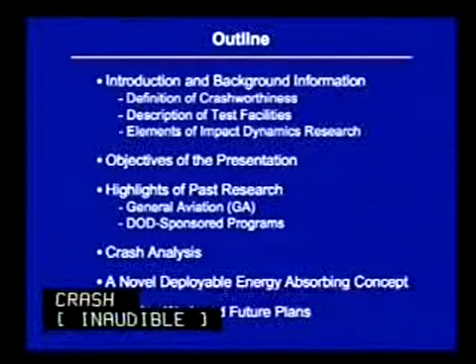Okay, this is just a short outline of my presentation. I'll begin by making a few introductory comments, try to give you a definition of what crash worthiness is. I'll describe test facilities that we have at NASA Langley and talk about some of the key elements of impact dynamics research, whether that research is applied to aeronautics or aerospace.

I'll then give the objectives of the presentation, and basically those objectives are to focus on three areas. First is highlights of past full-scale crash test programs that have been performed at NASA Langley. I'll talk in detail about crash analysis. I'll present a fairly novel deployable energy-absorbing concept that we have recently developed within our group. And then I'll conclude with some ongoing work and future plans. Next slide, please.

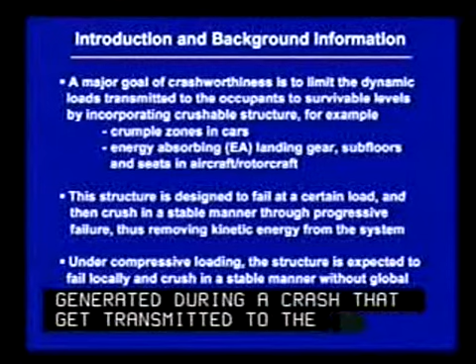The major goal of crash worthiness research, whether it's applied to automobiles or aerospace vehicles, is to limit the dynamic decelerative loads that get generated during a crash and transmitted to the occupants, to either survivable or non-injurious levels. We do this by incorporating crumple zones, for example, in automobiles, and in aerospace or airplane applications, we have energy-absorbing landing gear, subfloors, and seats. Now, the purpose of this crumple zone or crushable structure is to fail at a certain load and then to crush stably over a long period of time to dissipate kinetic energy. I'll talk a little bit more about that in just a moment. Next slide.

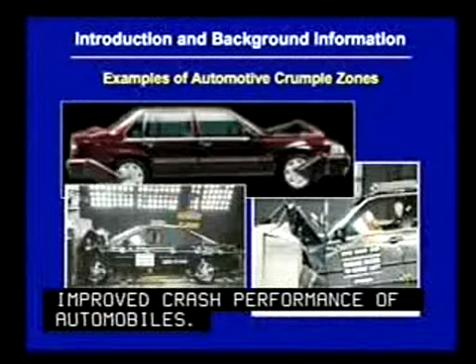Here are some examples of automotive crumple zones. The automobile industry has been very forward-thinking in applying crash features to automobiles. Part of the reason for that is regulatory requirements. Part of it is that the market demands improved crash performance of automobiles. Automobiles have crumple zones. They also have frontal and side airbags. They have anti-skid brakes. They have a lot of features that are designed to protect occupants in a crash.

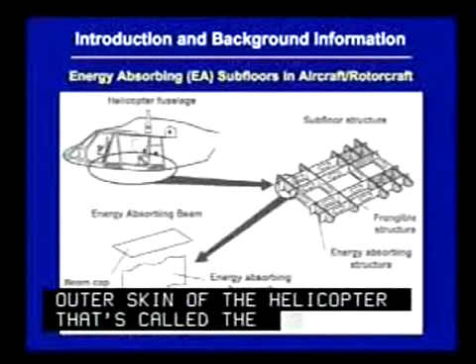Next slide, please. We also have similar features in rotorcraft and aircraft. For example, here I've shown a schematic drawing of a helicopter. There's a region between the floor and the outer surface or outer skin of the helicopter that's called the subfloor. And that region can be designed to absorb energy in a crash through controlled displacement.

Now, you're also going to hear me use a term called stroke. Stroke is very much a terminology that's similar to strain. Essentially, for this type of application, you have a structure that's subjected to compressive load. It deforms. You take that deformation, you divide it by the total original height of the structure, and then that's called the stroke. And when you multiply that times 100, then you get percent stroke. So you'll hear me use that terminology, and I just wanted to make you familiar with what it means. Next slide.

Now we ask the question, what factors are involved in aircraft crash safety? There are several important features and factors.

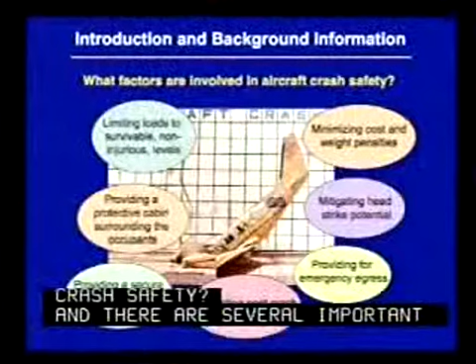The first is that we want to limit the loads that get transmitted to the occupants to survivable, non-injurious levels.

The next is you want to provide a protective shell surrounding the occupant. This is often very important for rotorcraft because you have large rotor and transmission masses mounted above the occupiable area of the helicopter. During a crash, that mass can actually deform the structure and close in on the occupants, which is an undesirable situation.

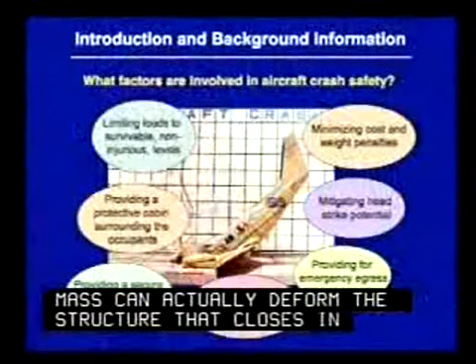You also want to provide a secure tie-down of the occupants using seats and restraint systems, so the occupant doesn't become a projectile inside the cabin of the aircraft.

You want to eliminate post-crash fire hazards, and this has essentially been done for most rotorcraft, especially military rotorcraft, using crash-resistant fuel systems. You also want to provide for emergency egress.

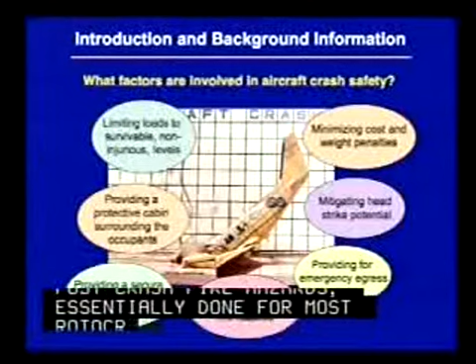You want to mitigate head strike potential, and again this is a challenge for rotorcraft because you have cyclic control sticks that are in the way when the occupant flails or the head falls forward, which can be a head strike potential. And you want to do all these things while minimizing the cost and weight penalties associated with crash.

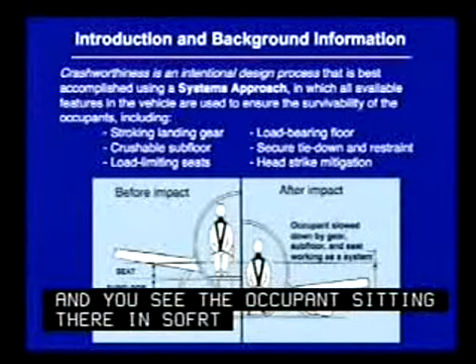Now I have a schematic that shows a before and after. You see the occupant sitting in a general aviation aircraft, and he has available to him a certain distance that can be used to absorb energy. He has landing gear that can stroke, a subfloor that can crush, and load-limiting seats.

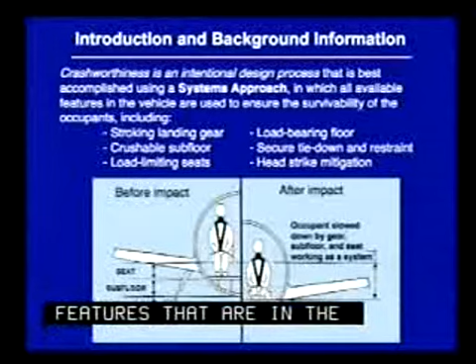The ideal situation for crash-worthy design is that it's accomplished using a systems approach, in which all of the features in the aircraft can be used to absorb energy and dissipate kinetic energy of impact. In the after condition, the landing gear is stroked, the subfloor has crushed, and the seats have deflected. The occupant has been decelerated in a controlled, stable manner, resulting in a survivable impact.

Now I'm going to switch gears with definitions and talk about facilities. I work at a very unique facility called the Landing and Impact Research Facility. It was recently renamed - we call it LandIR now.

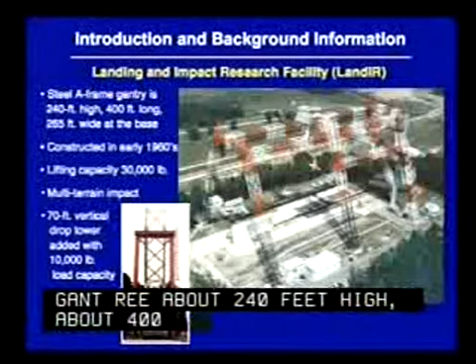It's a steel A-frame gantry, about 240 feet high, about 400 feet long, and about 265 feet wide at the base. It was constructed during the early 1960s, has a lifting capacity of about 30,000 pounds, and during the late 1970s we added a 70-foot vertical drop tower under the northwest leg of the gantry, used for vertical drop tests of fuselage sections.

The facility wasn't originally built as a full-scale crash test facility. It was built in the early 1960s as a lunar lander research facility, used to allow the Apollo astronauts to train for the last 150 feet of descent onto the lunar surface. This was used for this application from 1964 until about 1970. Using a tethering system, we could actually simulate the one-sixth gravitational environment of the moon.

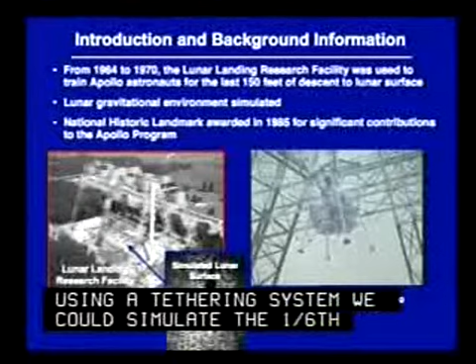Because of its significant role during the Apollo program, the facility was awarded a National Historic Landmark in 1985. You see a picture of the gantry - the surface underneath was cratered to look like the surface of the moon. The astronauts would climb into the lunar excursion module and practice lunar landings.

I have a short video to show you here of one of those practice runs.

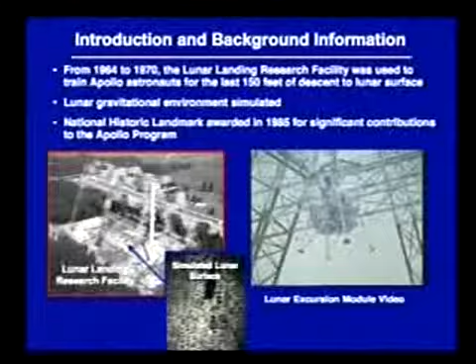As the Apollo program was coming to a close in the early 1970s, the facility was converted into a full-scale crash test facility. During the ten-year period from '74 until '83, we had a very active general aviation crash test program. I'll discuss that a little bit more later.

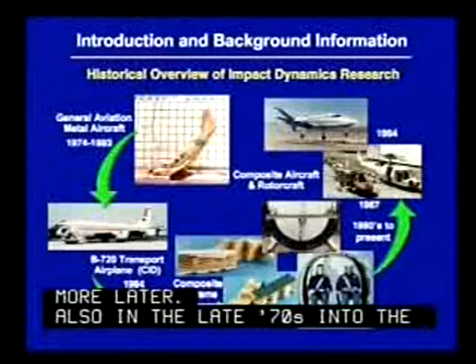Also, in the late '70s and into the early '80s, we were starting to look at crashworthiness of transport aircraft. That test program culminated with the full-scale remotely piloted crash test of a Boeing 720, performed out at Edwards Air Force Base and NASA Dryden.

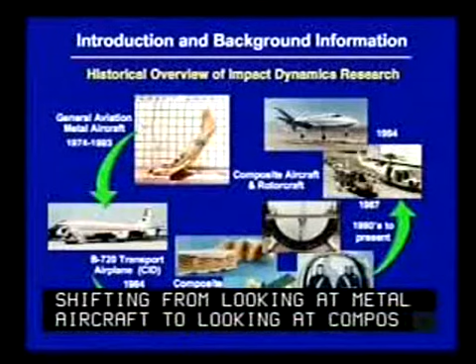In the early 1980s, the focus of the program was shifting from looking at metal aircraft to looking at composite materials. The research used a building block approach to see how we could incorporate energy-absorbing concepts into crash-worthy composite aircraft. We looked at crushing subfloor concepts, frame-stiffened designs, eventually fuselage sections, and the technology has matured to the point where we've done full-scale crash testing of all-composite general aviation aircraft and rotorcraft.

Finally, I want to talk about some of the key elements of impact dynamics research. Essentially, the goal of this research, of any research program that has an element of impact dynamics, is to develop a fundamental understanding of the crash response of aerospace vehicles. Once we understand the response, we can look at ways to improve the crash performance of that particular vehicle. That is like a stool, with 4 legs supporting it.

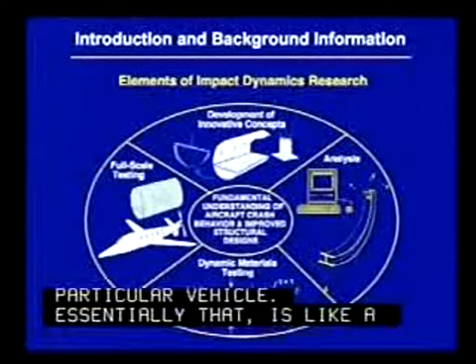The first is full-scale crash testing. We have this unique facility. We need to perform testing so that we can understand the physical phenomenon associated with crash.

We also have done quite a lot of work in impact simulations using analysis tools, and I'll talk about that shortly. We often have to look at development of innovative concepts for crashworthiness applications. And then the final key element is dynamic materials testing. Often if you go to a handbook, you can find stiffness properties, yield properties, ultimate failure strain, but you often will not find how that material behaves under dynamic loading. So we have to do testing to generate the information used in our analytical simulations to improve the correlation that we have.

Objectives of the presentation are to focus in 3 areas. I'm going to talk about some of the past full-scale crash test programs performed at the facility. This is sort of fun, you get to see videos, and I hope you enjoy it. Then I'll talk about crash analysis, and finally I'll talk about development of an innovative concept for crashworthiness that has recently been developed and has application to both aerospace and aeronautics.

Back in 1974, NASA entered into agreement with the FAA and the GA industry to look at the crash performance of general aviation aircraft. The objectives were to determine the dynamic response of the integrated system, the airframe, the seats, and the occupants. We also wanted to look at the effect of varying flight parameters on structural damage during impact, and we looked at failure modes of seat restraint systems and seats. The program also included a lot of background work on development of analytical simulation tools, test data evaluation, and structural concept development.

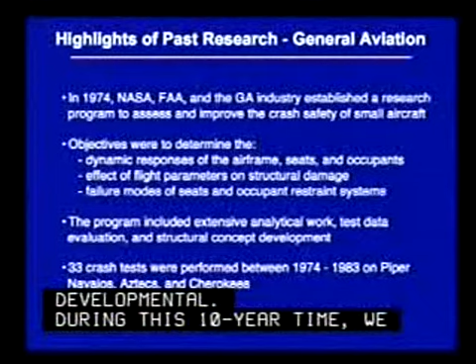During this 10-year time, we performed 33 full-scale crash tests, mostly of Piper aircraft, particularly Navajos, Aztecs, and Cherokees.

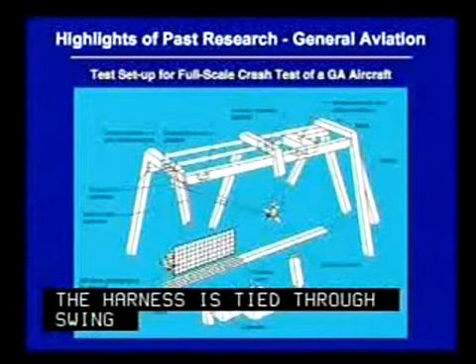This slide shows a schematic of the gantry, and I'll discuss how the facility is used for performing full-scale crash testing. Essentially, you see an airplane suspended from the gantry. There's a set of cables attached to an aircraft harness, and by adjusting the lengths of these cables, we can get pretty much any roll, pitch, or yaw attitude that we want. The harness is tied to the gantry through swing cables and pullback cables. We pull the aircraft back, release it, and it comes to the ground, and about 3 to 4 feet above the ground, all of the cables are pyrotechnically separated from the aircraft so that when it hits the ground, it's in free flight conditions.

We often have quite a lot of instrumentation on these tests, typically between 100 and 200 channels of data, collected at about 10,000 samples per second. We have a lot of external cameras, video cameras, high-speed film cameras, and cameras on board to see how the seats and occupants are responding. I think that's about it. Let's go on to the next slide.

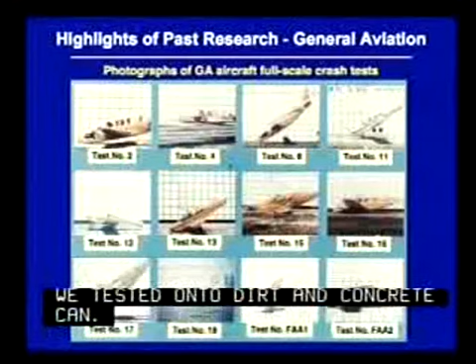This slide shows a montage of some of the tests performed during this 10-year period. You can see we tested high-wing aircraft, low-wing, some fairly shallow impact angles, and some were fairly steep. We tested onto dirt and onto concrete. We were really looking at this as a landmark study, used to establish what is a survivable envelope for crashes of these type aircraft. This is important because most of the fatalities and injuries that occur upon a crash of GA aircraft occur because of the impact itself, since these aircraft don't carry enough fuel to have smoke and fire as a major cause of fatalities and injuries.

As I mentioned, back in the 90s, and this is when I came on, back in the 80s, beginning of the 80s, the shift of the program focused from looking at metal aircraft to looking at composites.

This technology has matured to where we've done full-scale crash tests of a number of all-composite aircraft. Beginning in 1994, we did the first crash test of the Lear Fan. Just to let you know, the Lear Fan was the first all-composite aircraft to attempt FAA certification. Unfortunately, it failed certification, and the company went into receivership, and we were able to purchase 2 of the aircraft for crash testing.

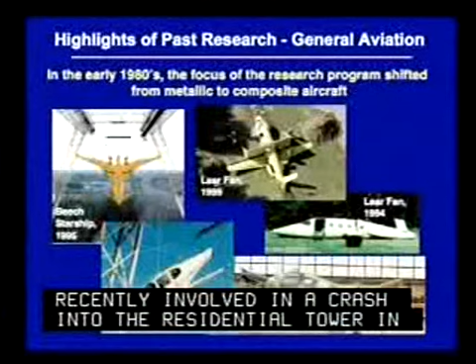We did a second test in 99. Now, the first all-composite aircraft that did get FAA certification was the Beech Starship, and we did a full-scale crash test of that aircraft in 1995. Then in 96 and 97, we did crash tests of the modified Cirrus SR-20. This is the same aircraft that was recently involved in a crash into the residential tower in New York that I believe Cory Lidle was actually flying. And then in 2001, we did a crash test of a modified Lancair. I'll tell you a little bit more about these in just a moment.

Next slide. Okay, now we're going to show you a video of the 1999 full-scale crash test of a modified Lear Fan aircraft. 2, 1, release.

You see, these tests actually generate a lot of interest. A lot of people show up. They get very excited. They are very interesting to see. I mentioned that this aircraft is modified. As I mentioned before, we have 2 of these aircraft. This aircraft was made mostly out of graphite epoxy. It was extremely stiff. It had very stiff composite stanchions in the subfloor.

So because we had 2 aircraft, we decided to do the first test in the baseline configuration. And the second test, we actually removed the composite stanchions in the subfloor and replaced them with a composite energy-absorbing subfloor of our own design. We also put in load-limiting seats. Both aircraft were tested for the same initial impact, but this aircraft actually had a secondary impact into a plywood barrier, and the reason for that is because we had side-facing seats. We wanted to introduce a longitudinal pulse to evaluate the response of the seats and the occupants to that longitudinal input.

Okay, next slide. Okay, now you're going to see a full-scale crash test of a modified Lancair. And this is a very spectacular test. It was performed at 96 feet per second, which was a really high impact velocity.

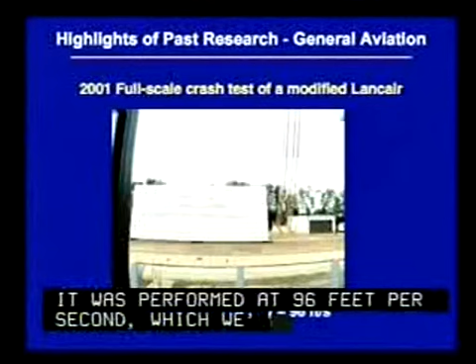You'll notice several things happen during the test. First is the tail falls off. The wings also shear off. The engine falls off. And the purpose of this is a term we call mass shedding. As you dump mass, you lessen the kinetic energy of the impact, and you don't have to dissipate that energy if the mass is then removed from the aircraft. So this is a common feature that you'll see in some of these tests.

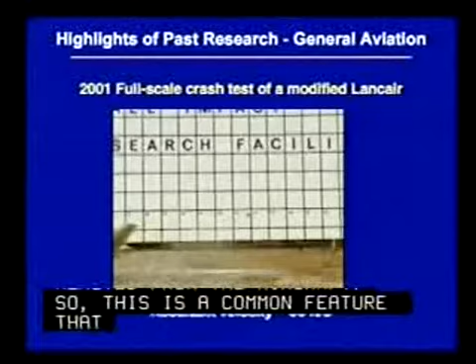Again, this was a very high impact velocity that we did, and this test was done in support of NASA's AGATE program, Advanced General Aviation Transport Experiments. Next slide. Okay, so what was all the big deal about all this crash testing?

First of all, as I mentioned, that was a landmark study. Before the GA crash test program, we did not know what a typical acceleration pulse was for a survivable crash of a GA aircraft. Now we know. And then that information was used to establish seat criteria that's used by the FAA today for certification. We were also able to look at occupant data and compare that data with known human injury criteria and to assess the survivability of a particular crash.

What we found from the early crash tests of composite aircraft is that the acceleration levels were much higher than comparable metal aircraft. Then as later aircraft came along, we found that minor improvements like that energy absorbing subfloor, load limiting seats, significantly improved the crash performance of these aircraft until they were in some cases superior to comparable metal aircraft. Next slide.

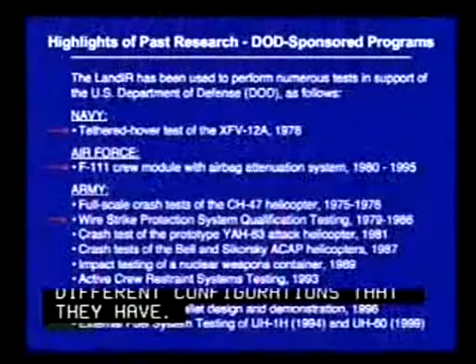Okay, now I'm going to switch gears again and talk a little bit about some of the support testing that we've done in support of the DoD. Because we have this unique facility, we often get asked to perform testing in cooperation with the DoD to evaluate various different configurations that they have. I'm only going to focus on 3 tests, one for the Navy, one for the Air Force, one for the Army. But you can see from this list that we have a high preponderance of doing tests for the Army.

There are several reasons for this. One is the fact that the Army's Aviation Applied Technology Directorate is located very close to Langley. They had a mission for safety and survivability and brought many of these tests to us. And also the testing is very compatible with the existing programs that NASA was also running. Next slide.

Okay, for the Navy, we did some static and dynamic tethered hover tests of the XFV-12A. This is a prototype aircraft, a VSTOL aircraft intended to take off vertically and then fly from vertical hovering. These tests were performed in 1978.

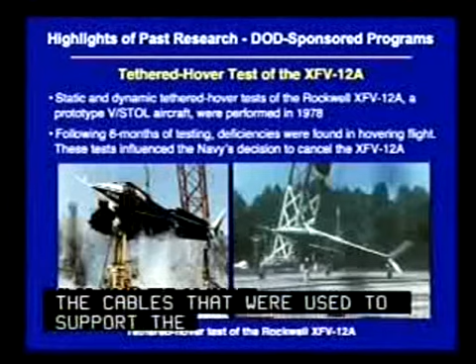Following six months of testing, some deficiencies were found in hovering flight. The cables used to support the aircraft had a load cell in series with the cables, and that load cell never read zero load, meaning the aircraft wasn't even supporting its own weight. Consequently, that led to the Navy's decision to cancel the XFV-12A program.

There's a short video here, and I'll let you watch that.

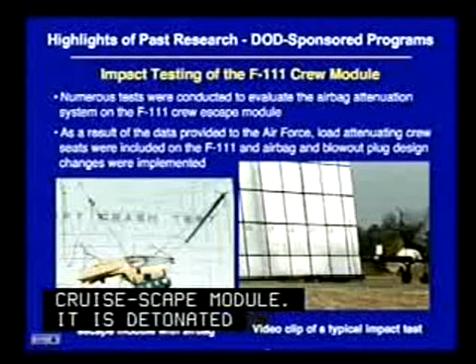We were asked to perform numerous tests in support of the Air Force for the F-111 crew escape module. When this aircraft gets into trouble, the entire crew module you see in the photograph is detonated away from the aircraft. It comes down on a parachute, and it has an energy attenuating airbag system with blowout plugs.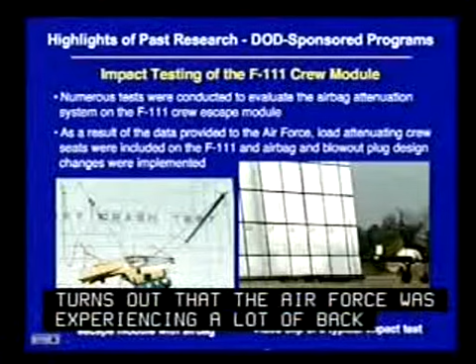Turns out the Air Force was experiencing a lot of back injuries and spinal cord injuries upon landing of this particular crew module. So they came to us and asked us to perform testing for them, and we did that.

As a result of the test program, the Air Force was convinced to add energy-absorbing seats into this airframe, and they made some modifications to the bag design and the blowout plugs.

We tested numerous times, probably between 60 and 70 tests. Go ahead and show the video, and you can see how the airbag system just didn't work like it was intended.

Interestingly enough, the facility is being geared up at this very moment to evaluate external airbags as an energy dissipation mechanism for Orion, the crew exploration vehicle. So it should be interesting to see how that works out.

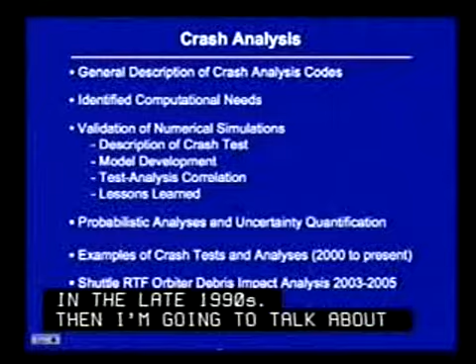I put a little outline chart here just to tell you what you're going to see. I'm going to describe the crash analysis codes that we use, talk about some results from a NASA workshop held in 1992, and show you an example of validation of numerical simulations. This was a research program done in the late 1990s. Then I'll talk about probabilistic analysis and uncertainty quantification, some examples of crash test analysis correlation performed since 2000 to the present time. We'll talk about support to the Shuttle Return to Flight program in impact analysis, and the analysis support we're providing now for the landing and descent phase of Orion. So a lot of work here, and I hope this is interesting to you.

We have used in the past codes like MSC Dytran and LS-DYNA. There are also codes PAM-Crash, Radioss, and Abaqus Explicit, and these codes can all be used for transient dynamic simulations. Interestingly, they all have as their parent code a code called DYNA-3D, which was a public domain code developed under Department of Energy sponsorship. It was developed at Lawrence Livermore National Lab and initially released in 1976. Constant improvements were made, and it was released again in later years. But because it was a public domain code, various commercial vendors obtained it, added extra features, changed it a little, and you see these commercial spin-offs. Because these codes have a common parent, they have a lot of common features.

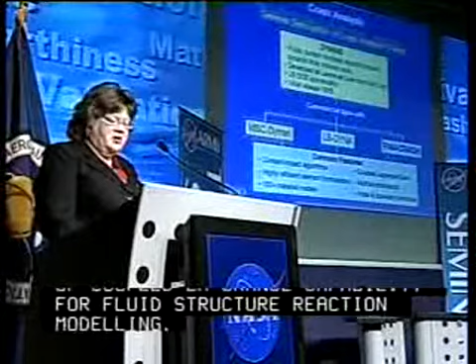These include contact impact algorithms, some of which are very complex. They have highly efficient element formulations—the codes wouldn't run without very simple but efficient elements. We have hundreds of material models available. Most of the codes have some type of coupled Lagrange-Euler capability for doing fluid structure interaction modeling. Multiple constraints are available, and the codes allow input of initial and boundary conditions.

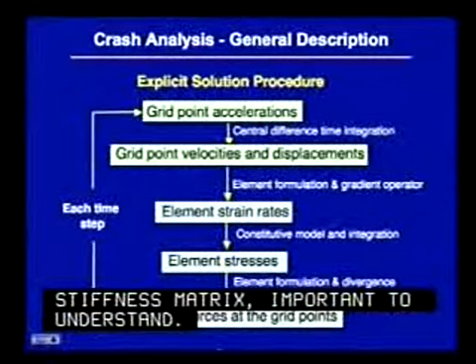Now this shows how the explicit time integration procedure is done, which is the basis of most of these codes. We use explicit time integration. I'm not going to go through all the details, but several points I want to make: first of all, nowhere does the code create and repetitively decompose a large global stiffness matrix. This is important to understand—most structural analysis codes, such as NASTRAN, do that. These codes don't.

Also, a key feature of the codes is the time step. The time step is determined by the time it takes a stress wave to cross the smallest element face in the model. So it's very important not to have extremely small elements in these models, because time steps can be on the order of a microsecond or less, and as the time step goes down, the time to run the simulation gets much longer. It's also interesting to note that for most structural analysis codes, as the complexity of the model increases with more elements, the time to run them increases exponentially. For these codes, as the model increases, the time to run them increases essentially linearly with added elements. So that's an important feature to understand.

Now for the example I'm going to show you in just a moment, we're going to be using a code called MSC Dytran. Again, it had a parent—its parent was DYNA-3D. The code is marketed by MSC Software. Later on, they actually purchased a code called PISCES, which is an Eulerian code, to allow MSC Dytran to have the Euler-Lagrange capability. They also made the input deck as compatible as possible with MSC Nastran, which is an important feature, because if you're familiar with Nastran, then when you look at an MSC Dytran deck, you say, oh, I understand what this is, because I'm familiar with it. So it has fairly widespread application within the aviation community.

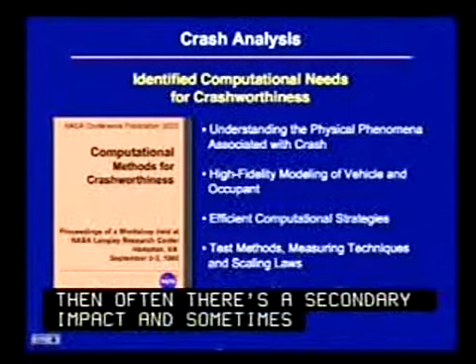First, we have to understand the physical phenomenon associated with the crash. What happens during a crash to the structure? Often there's an initial impact, and then often a secondary impact, and sometimes it's the secondary impact that's more important than the initial one. You don't know that until you do a test.

We also had to develop high-fidelity modeling of the occupant and the vehicle. Since this workshop, models have gotten more and more complex, and I'll talk about that in a moment. We also have to have efficient computational strategies, and we rely heavily on test methods to generate data for input into these simulations, for materials modeling.

And then finally, validation of numerical simulations. Essentially, the word was that we will not use these codes for design, during preliminary design, until we have confidence that the results coming out of them give us accurate results, so that we have this confidence level. We'll then use the codes for design.

The goal was to do these numerical simulations, do the test analysis correlation to build that confidence. Back in the late 1990s, a research program was initiated to specifically look at the capabilities of commercially available transient dynamic code, in this case MSC Dytran, in predicting the response of composite prototype helicopters subjected to impact loading.

There were 3 main parts of the program. The first was to do the crash test of a composite prototype helicopter with the goal of generating test data specifically for correlating with analytical data. We had to develop the model of the test article and run the simulation, and the third component was the test analysis correlation to validate the numerical simulation. So you're going to hear about each one of these pieces.

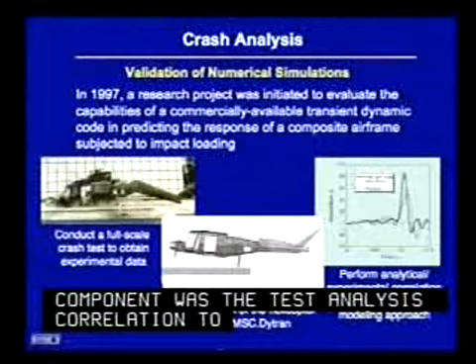This is what the test article looks like, at the moment of impact. The test article was the Sikorsky Advanced Composite Airframe Program Helicopter, or ACAP.

I have to step back just a minute to give you a little history. The ACAP was a program sponsored by the Army, initiated in the 1970s, and the intent was to encourage airframe manufacturers to use more composite materials in their design. They awarded 2 contracts, one to Bell, one to Sikorsky, and asked that they build a composite helicopter made primarily 80 to 90% of composite material, and that it would meet all of the military requirements - manufacturability, durability, reliability, and survivability.

At the time, survivability was determined by MIL standard 1290, which required that the helicopter and occupants survive a 42 foot per second vertical drop test, as well as a 27 foot per second forward component, which had a resultant of 50 feet per second.

The way Sikorsky met that requirement was by putting most of their energy dissipation in the main landing gear, so this aircraft had very sophisticated landing gear. It also had a crushable subfloor.

When we actually got the test article, it had been in storage for about 10 years at Fort Eustis, Aviation Applied Technology Directorate. When we got the aircraft, it did not have the original nose gear, so we had to put in a non-crash-worthy nose gear and try to retrofit it to improve the crash performance of the nose gear. We also had to make some modifications to the main landing gear.

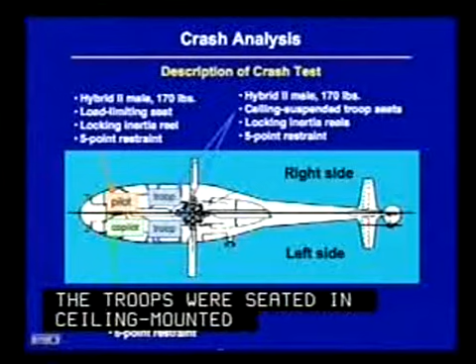I'll just point out that in helicopter lingo, the pilot sits on the right side, the co-pilot sits on the left side. So if I say right and left, you'll understand the pilot's on the right and the co-pilot's on the left.

Now I've got two videos that showed what happened during the crash test. You can go ahead and play the one that shows the overall version. Three, two, one, release. Okay, so that was the overall. Now you can see the video that shows a close-up of the dummies and a little bit more detail about what happened during the test.

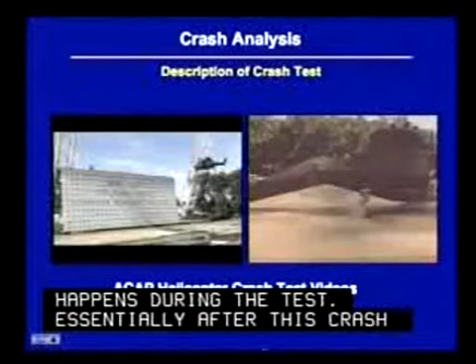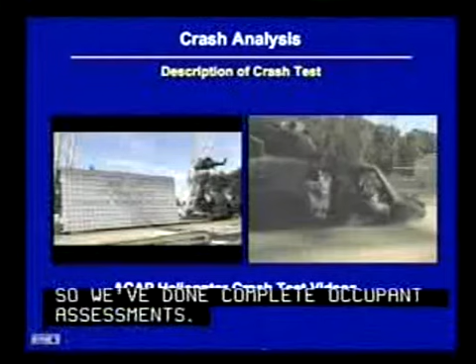Essentially, after this crash test was performed, we did a complete occupant assessment to look at whether these occupants survived this test. Our general assessment was that this was a survivable test. However, probably you would have seen some injuries. We did this by looking at things like lumbar load. We don't want the lumbar load to exceed 1,500 pounds, that's the limit for non-injurious conditions. We also looked at the dynamic response index, the Brinkley index, and we looked at whole body acceleration with comparison to the Eiband curves. So we've done complete occupant assessments. This is important because we're doing the same kind of work now to assess impact survivability for Orion and the crew exploration vehicle.

Also, I wanted to point out the importance of load-limiting seats. So what you're looking at are pilot vertical acceleration data and co-pilot vertical acceleration data. The blue channel is the floor-level vertical acceleration near the pilot seat and near the co-pilot seat. The dashed red response is the seat pan acceleration. The dashed green response is the chest acceleration in the vertical direction of the pilot and the co-pilot. For the pilot, you'll see that the peak acceleration at the floor is about 95 Gs. The effect of that load-limiting seat was to reduce that acceleration down to about 40 Gs for the loads transmitted to the occupants. This is very important, a 55 G differential. Now, if you look at the co-pilot, the maximum acceleration peak is about 90 Gs, and that got reduced to about 35 Gs, again a differential of 55 Gs. Very important to have limiting seats. Otherwise, that floor-level acceleration would have been input into the occupant. Instead, it was reduced by 55 Gs. So very important, and I know that people are now working on looking at seating systems for Orion. This is very important.

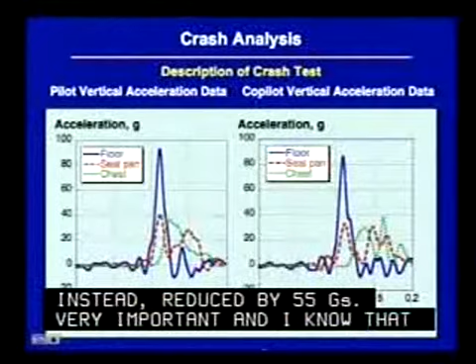Now you're going to see a detailed photograph of the subfloor model and also a picture of the actual pre-test subfloor in the aircraft. Now this aircraft had a very unique subfloor, it was a beaded web design. The top portion that you see was made out of graphite epoxy. That portion of the subfloor was not designed to crush. It was intended to react the loads of the crushable portion and to provide a stable platform for the seat and occupant restraints.

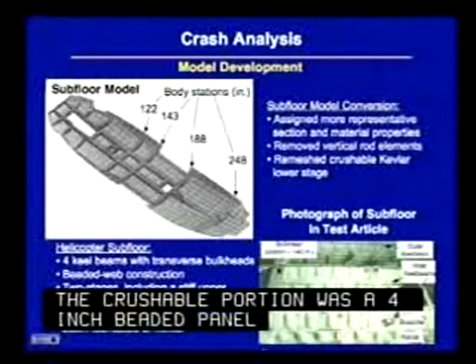The crushable portion was a 4-inch beaded panel made out of Kevlar that you see at the bottom of that photograph. We had to take the Nastran model and rediscretize it so that we could predict the crushing of that lower portion of the subfloor.

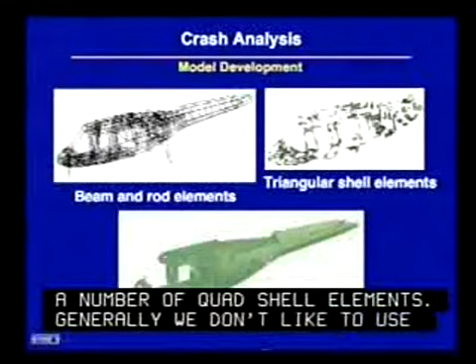This is some of the various components in the model. There were quite a number of beam and rod elements, triangular elements, and quad shell elements. Generally we don't like to use triangular elements because they're too stiff to run in these explicit simulations, but for this case we had to start with the Nastran model, and that tied our feet to it.

Now, the landing gear response. The landing gear was very complicated. As I mentioned before, Sikorsky designed the landing gear to take out 80% of the impact requirements for the MIL standard, a 50 foot per second impact. The way they did it is they had a 2-stage landing gear: an oleopneumatic phase about 12 inches long meant to handle hard or student landings, and if there was an impact landing, a shear pin would break and you'd engage a crushable honeycomb stage about 25 inches long.

You'll notice that when the gear is fully extended, it's about 12 degrees rotated from vertical. During an impact, the gear actually deforms upward and rotates outward, so it has a very complex response. The question was how best to model this with our MSC Dytran code.

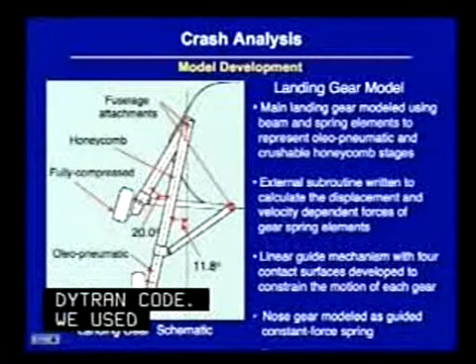Turns out what we used was a kinematic model. We used beams, springs, and masses to predict both the oleopneumatic phase and the crushable honeycomb phase. An external subroutine was written to calculate the nodal positions and velocities, used to represent the landing gear responses. We had a very complicated guide mechanism for alignment, and the nose gear was simply modeled using a spring element.

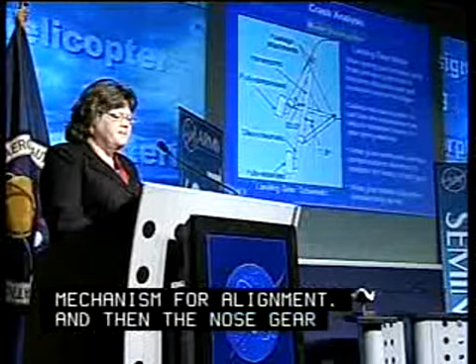This is our MSC Dytran model, not a whole lot different from the previous model. You see we have an impact surface, we have the modeled landing gear, and the total number of elements is now down to about 6,600. Very simplistic model for the time.

Remember, this was done between 1997 and 1999, so this is a while ago. We reduced the number of material properties from 200 down to about 29. So this was a challenge. I want to stress that this was not an easy conversion. It took 3 of us working about 6 months just to convert the model from Nastran to Dytran, and then a few more months to get the Dytran model to perform like we wanted. So it took a lot of effort to get to this point.

Now, one of the things we had to do was handle that landing gear response. From time equals 0 until 0.1 seconds, really the only thing that's involved is the landing gear. The fuselage is just sitting there with the exception of the tail cone. So we decided to implement a 2-stage modeling approach. During the first 0.045 seconds of the simulation, the fuselage section itself was modeled using rigid material properties.

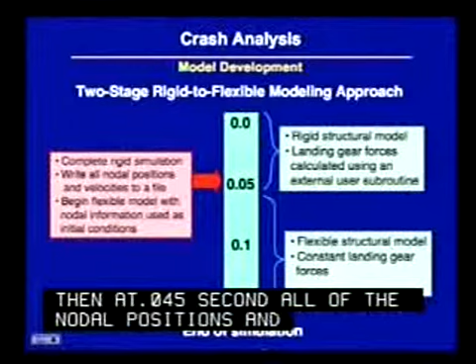Then at 0.045 seconds, all of the nodal positions and velocities were printed out to a file, and this file was used as input to the flexible simulation, which was run until the end of the simulation at 0.15 seconds. There were several reasons for doing this, and I'll talk about that next.

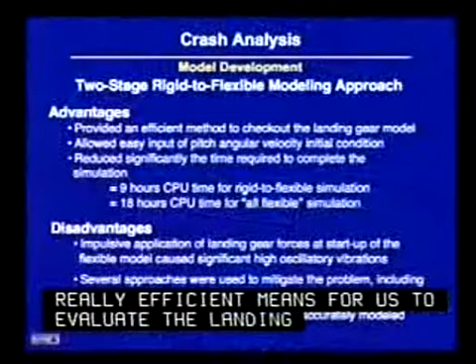The first advantage is that this simulation approach provided an efficient means for us to evaluate the landing gear response. It also allowed us to input the pitch angular velocity, which wasn't possible at the time using the flexible approach. It also significantly reduced the CPU time to run the model—we went from over a day, 18 hours, down to about 9 hours, so we could run it overnight. This was important.

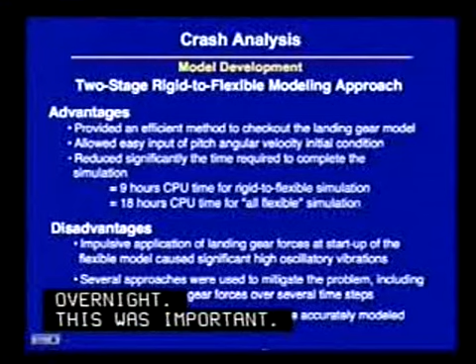The disadvantage, however, is that at the point where we transitioned from rigid to flexible, the landing gear forces were quite high, on the order of several thousands of pounds, and those were input impulsively and instantaneously into the flexible model, which generated some high oscillations.

We tried some approaches to dissipate those, but were never really completely successful, because we were modeling the fuselage as a rigid model, so we weren't able to capture completely the tail cone dynamics. You'll see that in a moment.

Now I'm going to talk about test analysis correlation. We look at several things. First, we try to look at kinematics—do we get the time sequence of events correct? Next, do we get the discrete failures that occur, and do we model those accurately? Third, do we correlate well with the acceleration data from accelerometers and other instrumentation on board?

So for correlation of time sequence events, we essentially captured that very well. It's maybe a little difficult to see, but we actually got the time of left gear contact, then right gear, then nose gear, and the time of transitioning from the oleopneumatic phase to the crushable honeycomb phase in the landing gear. These were actually very well predicted.

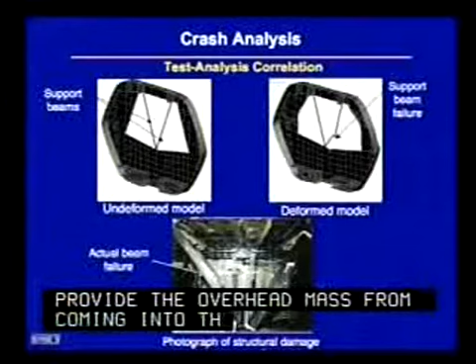It turns out that at the point where the structure supports the overhead rotor transmission mast, they have a very beefy bulkhead, and also two beams that provide extra support to prevent the overhead mass from coming into the fuselage during an impact. You can see a picture of what those two frames look like, and the undeformed model. During the simulation, we actually predicted the discrete failure of one of those beams, using a very simplistic failure model for the composite failure based on maximum strain. Not a very sophisticated composite failure model, but we were able to predict failure of that beam.

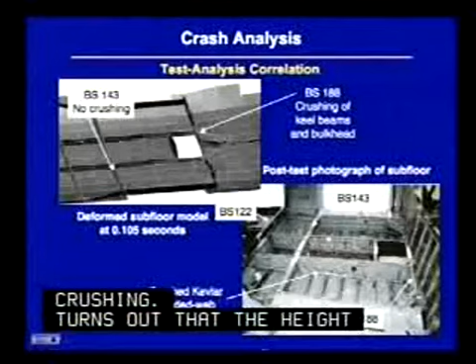We were also able to predict crushing of the subfloor. Crushing was localized to a region near this bulkhead at body station 188. We were able to predict that crushing. It turns out the height of the crushable structure was about 4 inches; it only crushed during the test about 1 inch, and that's about what we were able to predict.

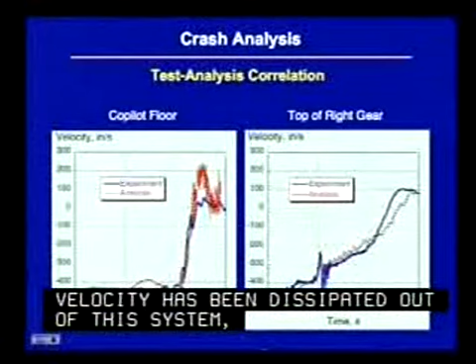The experimental data is shown in the solid blue line, and the analysis is the dashed red line. The first thing you'll notice is that between time equals 0 and 0.1 seconds, no velocity has been dissipated out of this system—it's essentially held constant. We actually predicted that fairly well, but you'll notice that at 0.045 seconds, we transitioned from the rigid model to the flexible model. We introduced some oscillations, and that's why you see that response there. We also over-predicted the rebound, but in general we correlated fairly well.

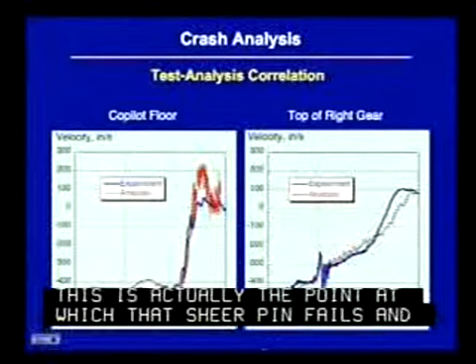Now at the top of the right gear, we see a very different response. From time equals 0 until 0.1 seconds when the fuselage impacts, velocity is being removed from the system, and we predicted that very well. You'll also notice that at 0.05 seconds there's an oscillation in the experimental response—this is actually the point at which the shear pin fails and you transition from the oleopneumatic stage to the crushable honeycomb phase. It introduces an oscillation, and we saw that and were able to predict it fairly well.

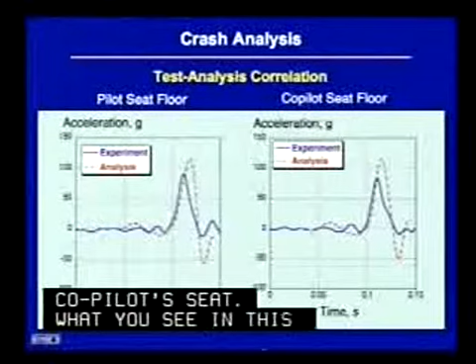Okay, now let's look at some acceleration plots. We're going to look at an accelerometer located near the pilot's seat and one on the floor near the co-pilot's seat. What you see in this correlation—this is filtered acceleration data—is that we over-predicted the peak. We didn't actually predict the timing of the peak that well, but in general, given the technology at the time, we look at this and say, hey, we were in the ballpark. We did pretty good.

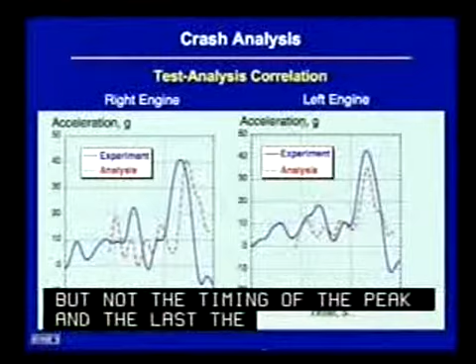So what were some of the lessons learned from this exercise looking at test analysis correlation? First, we had difficulty converting a static model into a dynamic model, and I dare say we'd have the same difficulties today, maybe a little easier. We also stressed the importance of conducting an integrated simulation with a kinematic model of the landing gear and a finite element model of the fuselage section.

We also did not use very sophisticated failure models for composites. Now we have much more sophisticated failure models, but at the time we had max strain, and that's what we used. So it is fairly difficult to model initial and progressive failure in composites.

We also had some difficulty in inputting our initial conditions, and we had issues with meshing and element selection. Finally, you heard me use terminology describing the test analysis correlation as being in the ballpark.

We talked about magnitude of the peak acceleration, timing of the peak, and pulse duration. These are qualitative assessments of correlation, and we really needed to look at quantitative assessments to build confidence in the use of these codes. So we needed to look at uncertainty quantification in both the analysis and the experiment, improved correlation methods, and particularly probabilistic analysis.

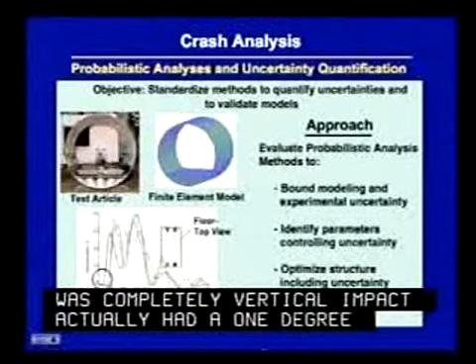We actually have done some work in this area of probabilistic analysis and uncertainty quantification. We did a vertical drop test of the test article shown in the photograph, a composite fuselage section. The test was specifically performed to quantify experimental uncertainty, meaning it was instrumented with accelerometers located in symmetric positions, and together, so we could compare responses. What we found was that what we thought was a completely vertical impact actually had a 1-degree pitch, and we had to account for that pitch in the simulation to get good test analysis correlation.

We also have used probabilistic analysis methods to bound the modeling and experimental uncertainty, to identify parameters controlling the uncertainty, and to optimize the structure assuming uncertainty in the parameters.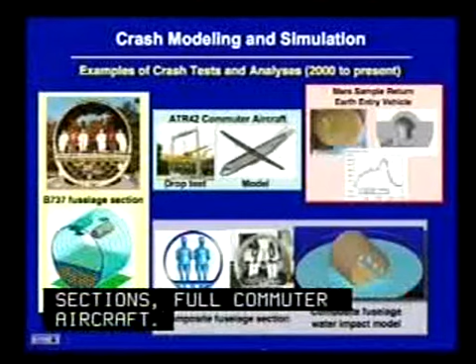Since the late 1990s, we've had plenty of opportunities to look at test analysis correlation using analytical methods. We've more or less switched from using MSC Dytran to LS-DYNA, and performed simulations of transport aircraft, fuselage sections, full commuter aircraft. We did testing and analysis support for the Mars Sample Return Earth Entry Vehicle, and integrated simulations with human occupant models incorporated into the finite element model of the structure, and also fluid structure interaction.

The expertise gained through this test analysis program was used to support the Columbia Accident Investigation and the Return to Flight program. The team at NASA Langley worked in cooperation with other research centers, NASA Glenn, also Marshall, and with Boeing Philadelphia and Southwest Research Institute, to focus on determining the threshold of damage to the shuttle wing leading edge panels for impact of various debris sources, including foam, ablative material, ice, and other debris including tile putty and gap filler.

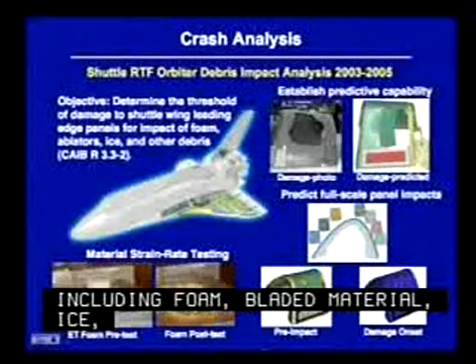Focusing early on, we were trying to look at what the impact scenario that brought down Columbia might have been, looking at, for example, the test performed at Southwest Research Institute on foam impact onto panel 8, and the simulation using LS-DYNA. It was very important for us to do material strain rate testing so we could determine material properties of foam, ice, and these debris sources to input into our simulations.

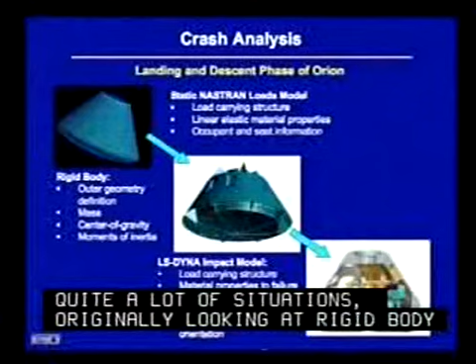Currently we're supporting the landing and descent phase of Orion with quite a lot of simulations. Initially we looked at rigid body models, examining outer geometry, mass, center of gravity, and doing stability analysis during impact to see what conditions would cause tip over or rollover. Now we're looking at flexible models, and hope to continue to an integrated, fully flexible model of the command module that includes dummies, seats, restraints, and any external energy absorbing devices that might be used.

Okay, let's switch gears now and go on to another topic.

Okay, this is my final topic. Basically, I wanted to talk about development of novel concepts.

The novel concept I want to talk about is a deployable, externally deployable, energy-absorbing concept that looks like composite honeycomb, and that's really what it is. The key feature is this unique flexible hinge design that allows the honeycomb to be stored flat and then deployed either linearly or radially to give us the energy absorber that we need.

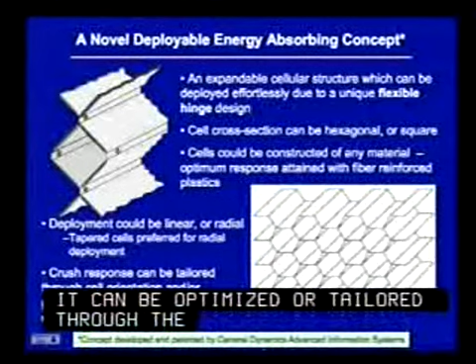The structure can be optimized or tailored through the choice of cell geometry. You see here a square cell and also a hexagonal cell. We can use different materials; to date we've looked at fiberglass, epoxy, spectra, and Kevlar. We can modify the cell geometry, the wall thickness, and tailor the response that we want.

This shows some of the deployment mechanisms that can be used. We can use pneumatic deployment, mechanical deployment, or hydraulic deployment. The section can be deployed linearly or it can be deployed radially, as shown there.

I will mention that this concept is very lightweight and very structurally efficient. It weighs about 1.1 pounds per cubic foot. This is typically the weight you would expect to see for some structural foams, so it's an extremely lightweight material.

Because of its unique properties, we saw potential applications of the concept for all of these items listed here, but I'm going to focus on helicopter crashworthiness and landing system for a crew exploration vehicle.

We thought the concept could be used in a radial fashion to provide energy absorption for landing of the Orion concept. This is just one of many concepts that have been evaluated; there are other concepts, airbags, other landing systems that have been looked at, so this is just one of many.

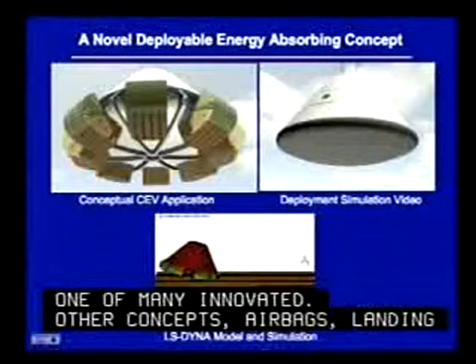I want to show you a short video that illustrates how the deployment might be accomplished, and you can see that here.

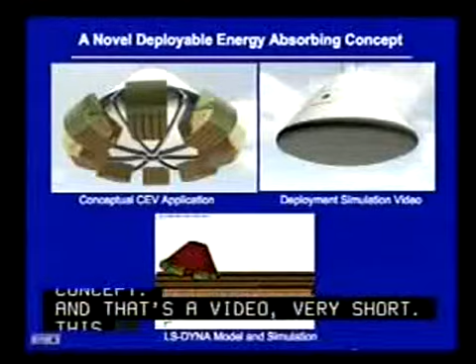In the work we're doing in simulation, we're actually performing trade studies to evaluate all of the concepts. This one was modeled, and you see an LS-DYNA simulation of the deployed concept. This was about a 40 foot per second horizontal with only a 5 foot per second vertical simulation.

Now, this concept has some attractive features for aerospace or aeronautics applications. What you see here is a plot of crush stress versus crush stroke for this concept. It was designed for 30 psi crush.

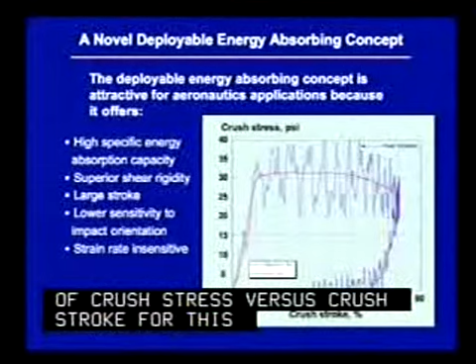You'll see the blue line is the actual data; it has a lot of noise in it, and then you filter it and get this response. We got excellent energy absorption behavior up to about 70% stroke.

The concept has very high specific energy absorption capabilities, meaning high energy absorption and low weight. It has superior shear rigidity, large stroke, seems to be independent of the impact orientation, and also appears to be strain rate independent. So it looked very attractive for aeronautics applications.

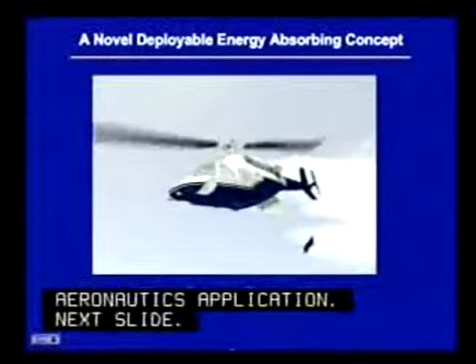This chart, or this video, shows how this concept might be deployed on a helicopter. This is not a real helicopter, just graphics, but it shows how it might be accomplished.

I mentioned that the concept looked attractive for energy absorption in aeronautics applications, so we decided to test it in a vertical drop test of a composite fuselage section. We added 4 of these deployable structures to the bottom floor of the fuselage, which was loaded with 10 100-pound lead weights to simulate floor loading.

We pulled the section up to about almost 25 feet, which is pretty high, and dropped it vertically, getting an impact velocity of about 38.6 feet per second, which is really pretty severe. Here you see a post-test photograph, and you can see that the deployable structure has deformed and crushed — looks like what old Coke cans used to look like when crushed.

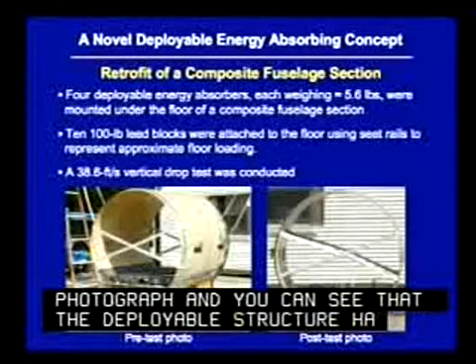This is a short video of the test. 3, 2, 1, release.

What we found out after the test is we saw no visible damage to the upper section of the fuselage or the floor. Also, the average accelerations at the floor were about 18 Gs. This is phenomenal for this application and a significant improvement over previous designs. We also found out that 93% of the kinetic energy of the impact was dissipated by crushing of the subfloor, which crushed about 14.5 inches. The original height was about 20 inches, giving us a 73% stroke. So it's an excellent example of this concept.

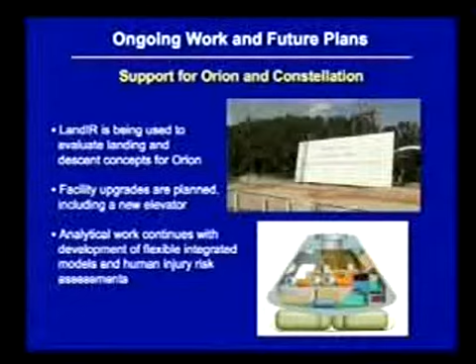This again has a large forward velocity and not a very high vertical velocity. We're impacting into soft soil. And this is the half-scale rigidized concept that we're doing initial testing on.

We also have some facility upgrades planned. We're getting a new elevator, so we don't have to climb 22 stories to get to the top. Analytical work continues to be performed in conjunction with the testing, and we hope to have a fully flexible integrated model—by integrated, I mean seats, occupants, restraints, external energy absorbing devices, and the flexible model of the aircraft as time goes on. Next slide.

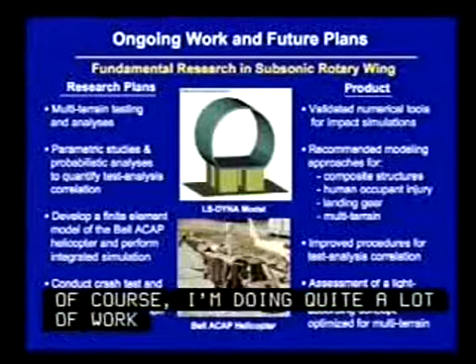I'm doing quite a lot of work on fundamental research in subsonic rotary wing. Our research plans are basically to do multi-terrain evaluation of our energy-absorbing concept and correlation with analysis. We want to look at more detailed parametric studies and probabilistic analysis approaches to quantify our test-analysis correlation instead of saying, hey, we're in the ballpark. That just doesn't cut it.

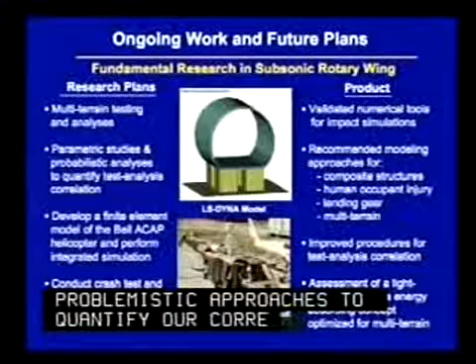We also plan to do a full-scale crash test of the Bell ACAP. We have a flight test article from that test program, and we plan to do a full-scale crash test as well as a fully integrated finite element simulation.

And last slide. Next slide, please.

I hope you realize that I don't do all this research by myself. This is really a team effort, and I am as honored as I am to be here. I'm very glad and very pleased to work with such a wonderful team at NASA Langley. I've listed all the names—I'm not going to read them out to you, but I'm very grateful for all the work that they do to support this research. Thank you very much. I hope to answer any questions that you may have. Thank you.